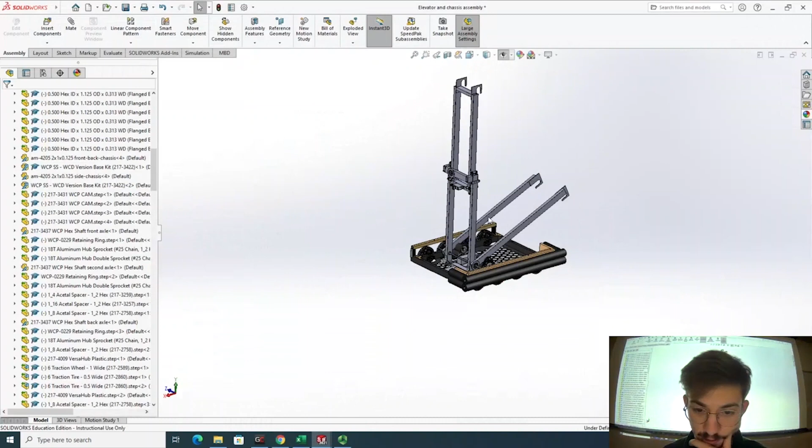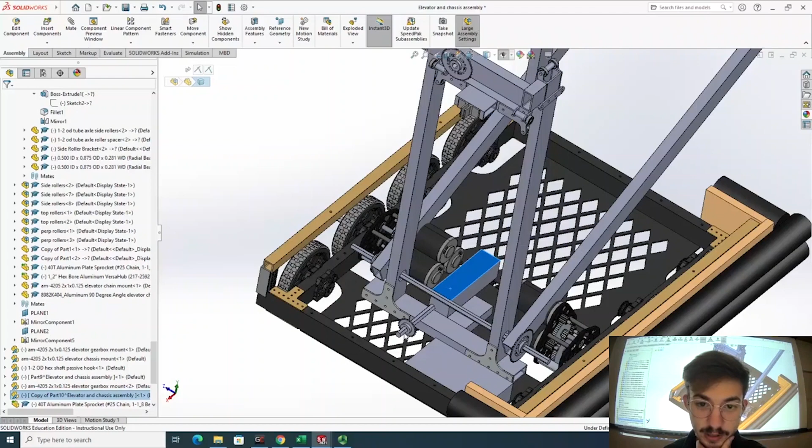So this is the overall design we're going to use. We're going to have a cascading elevator, or not a cascading elevator, it's only one stage. So we're going to have chain going around this sprocket. It'll be driven, this isn't a complete CAD model, but it'll be driven by a gearbox down here with chain going all the way up around this sprocket, and then it'll secure itself to the next stage in between here and then continue back down to this sprocket.

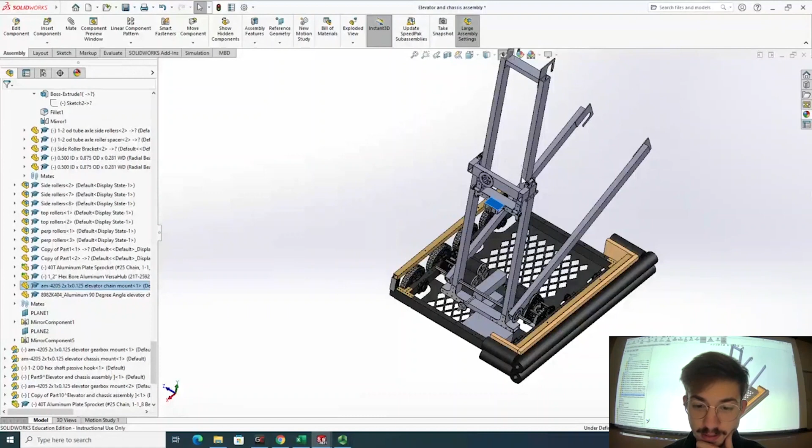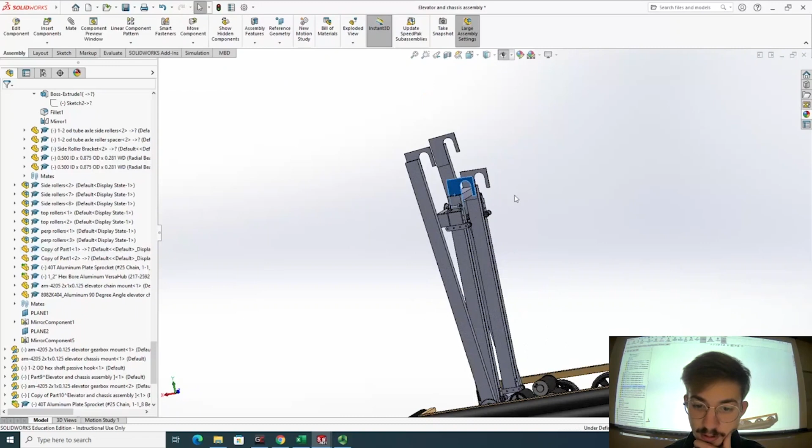Now, in order to be able to traverse to the next rung, our plan is to use these secondary passive hooks. So the way this will work in theory will be these arms will extend up, they will grab onto the rung, we will pull the robot up, and then once these come back down, I believe the lowest point they go to is right about here. These will engage, and these will be driven by a motor down here that will be geared very high. I'll talk about that in a bit.

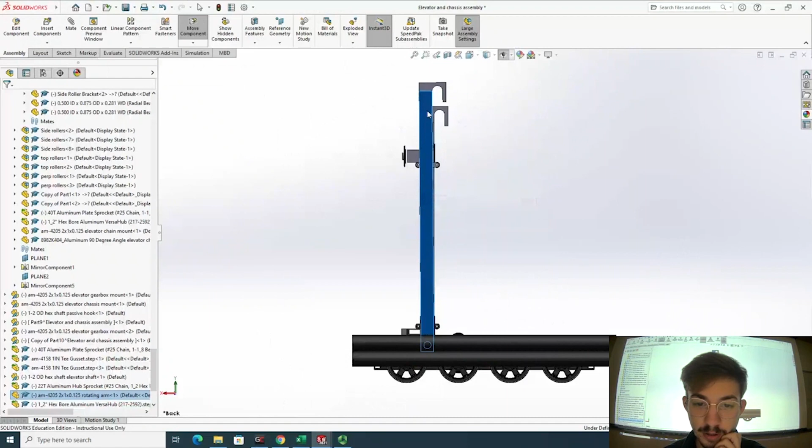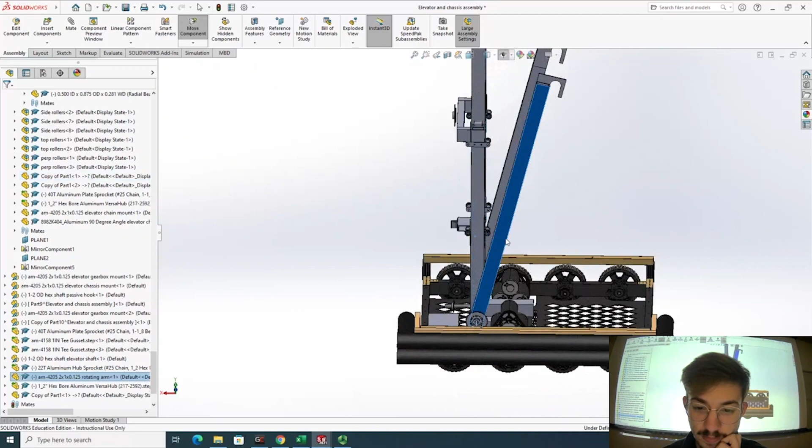But essentially, now that we have these locked on, well, they're not locked onto the bar, but they're close to. They're right above these. These will start inching up and essentially pass off the bar to these hooks. And so once these are disengaged from that first mid-rung that we're going for, what we can do is we can shift these arms this way. So essentially the way our robot will look approximately will be something like this.

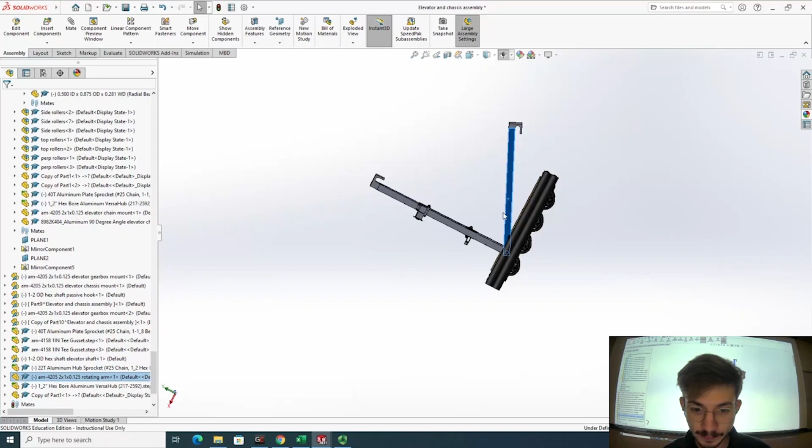These will need to go approximately 63 degrees, if not more, which is quite a lot, and we're going to have to counterweight the robot in theory. So then this extends to the next rung, and this will then shift our robot back as we need it to for these to engage the next rung. And then once these are engaged, we will pull ourselves up a little, disengage these, and repeat the process. So in theory, you'd be able to continue to climb to the next one, but obviously we'll need to test if this even works.

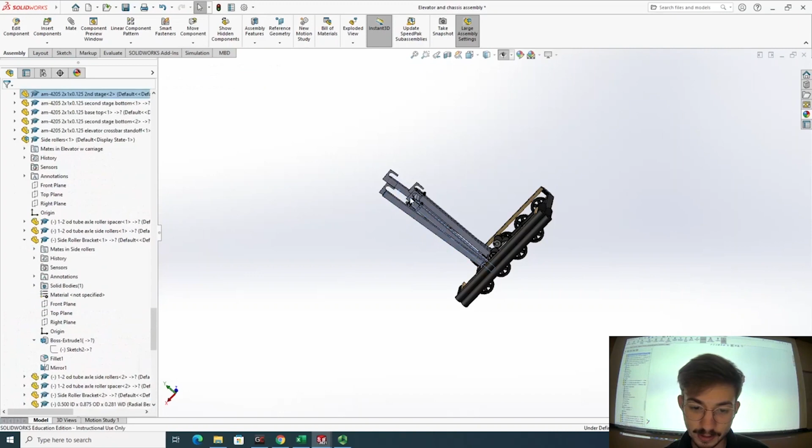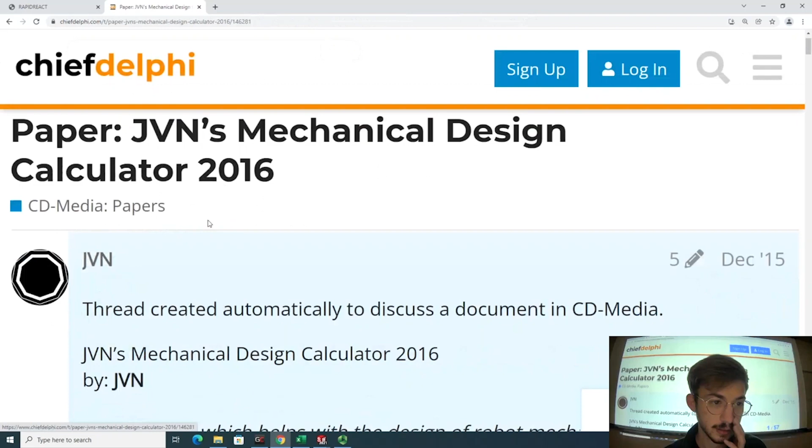So in terms of gearing everything, what we used was the JVN Calculator. So if you're not familiar with that, you can just search JVN Calculator Chief Delphi. It's already popping up for me because I've searched it. And you can, I don't know why I'm zoomed in so much, but you can download one of these Excel files, open it up, and it's very useful for calculating what gear ratios you need.

So for our passive hook, which is going to be just hooking on, what we did for this was we decided we would use two 775 Pros, and the arm length is essentially the distance between our axle right here and our center of gravity. We don't yet know what our center of gravity is, but we are assuming we're going to try and get it as close to the elevator as possible, and we assume that it will be no more than a foot away from this axle.

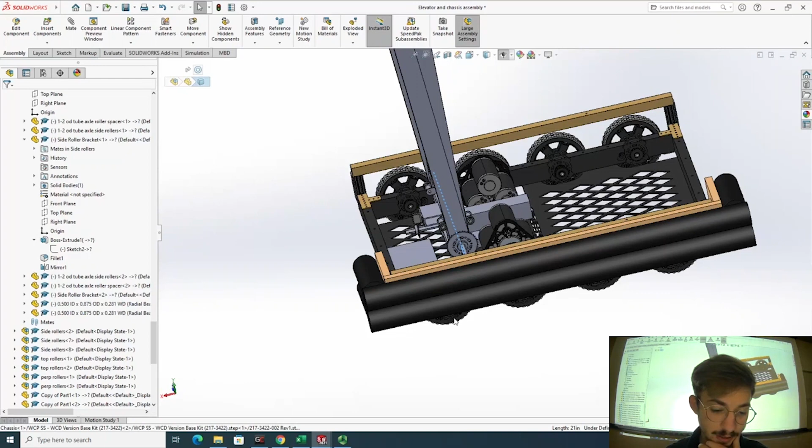And so that will be our moment arm, or like the distance that the force is acting on the robot. And so the center of gravity, we take it to be somewhere around here. We're making a lot of assumptions here. And our robot weight, we put at 155.

And so from there, we're going to be using a 100-to-1 AndyMark gearbox, and then I believe they're called Banebot dual inputs, that you can find on AndyMark, and those have a gear ratio of 3.25 to 1, and so that's how we're coupling the 775 Pros to the 100 to 1 gearbox.

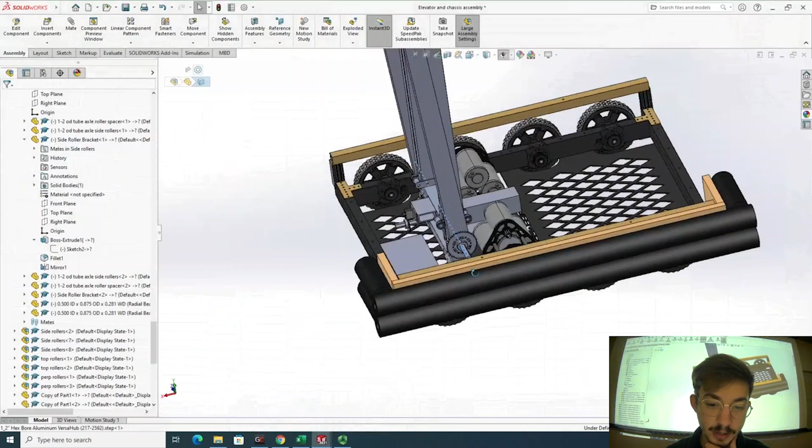And then the sprockets you saw on this CAD model, I don't have one on this side yet, but we'll have a 22 tooth to a 40 tooth sprocket. So that'll gear us down for a total ratio of 590 to 1, or 591 to 1. And so from there, we found that our max stall load is going to be 402 pounds, which should give us pretty good clearance. And this is assuming only 65% efficiency in the gearbox.

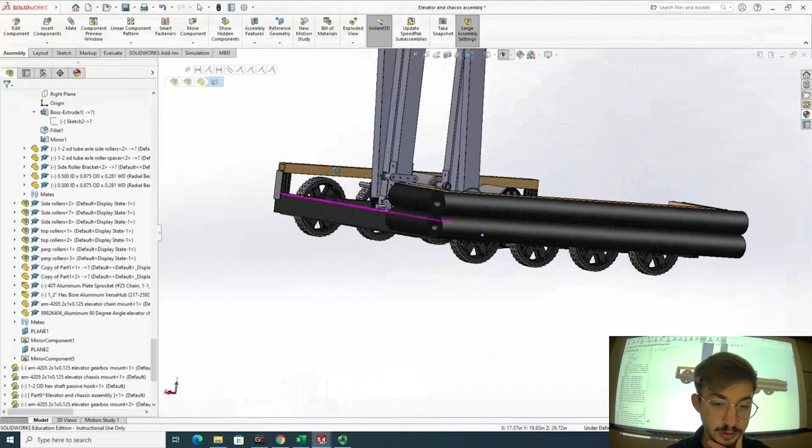Now for the elevator, you can also use this calculator. We're going to use a single 775 Pro with a 48 to 1 AndyMark gearbox, which was sponsored to us by AndyMark this year. And then we will drive it with a sprocket, which will add 40 to 22. So this is the 22 tooth sprocket, 40 tooth sprocket up here. And that will give us a stall load of 466.

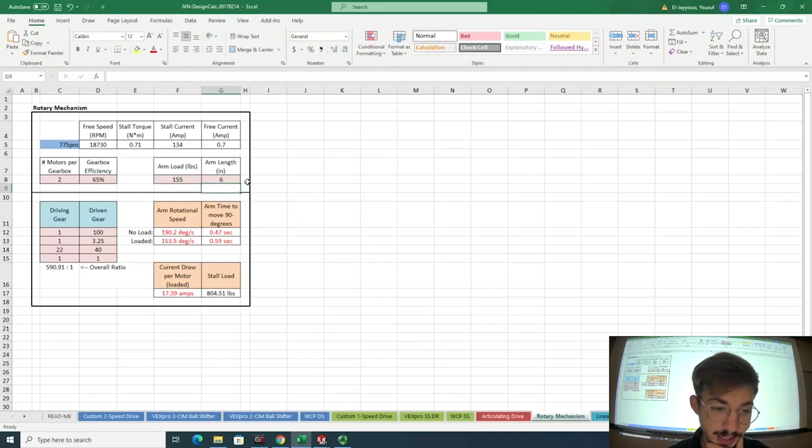And also the arm length, we have it at 12 inches. In theory, we think ideally it's going to be closer to 6 inches, and so that would double our max stall load.

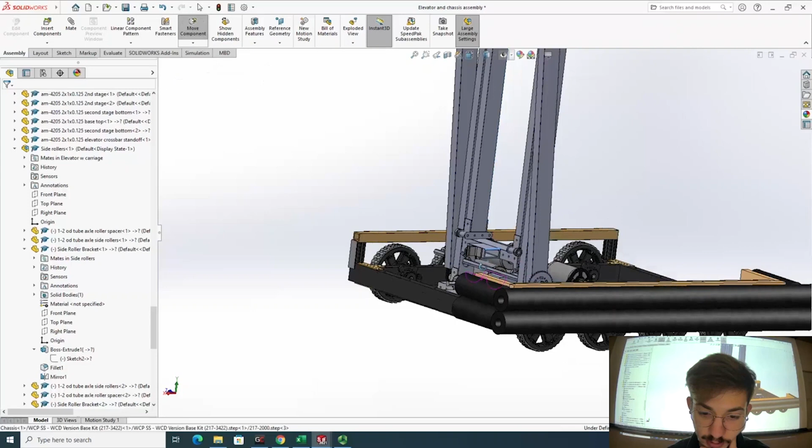And just to show you guys the extension of this, we're actually already folded up, so I'll show you guys what that looks like in the CAD model. Let me make sure we're not too low, that we're hitting this. We'll put a hard stop there later on. Gonna go ahead and save that. Open up my drawing file.

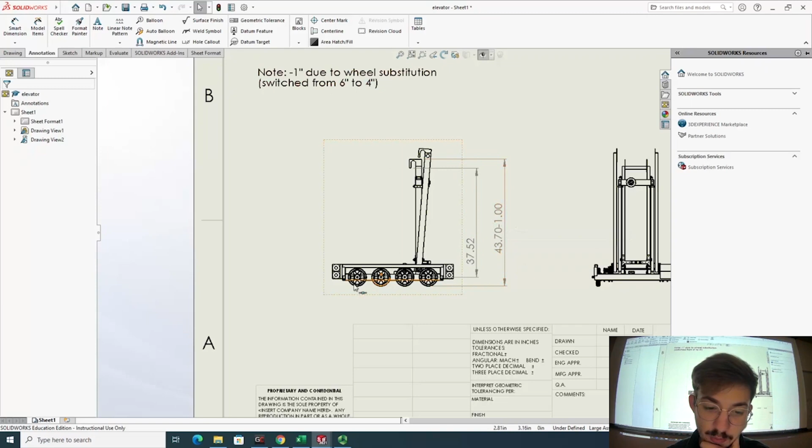All right, so starting configuration, 43.7 inches. The -1 is because we actually switched out our wheels to be 4-inch wheels instead of 6-inch wheels. So we're an inch below that, so we'd be 42.7. So we're well below the total height. Well, I guess this top one will be folded forward during our starting configuration.

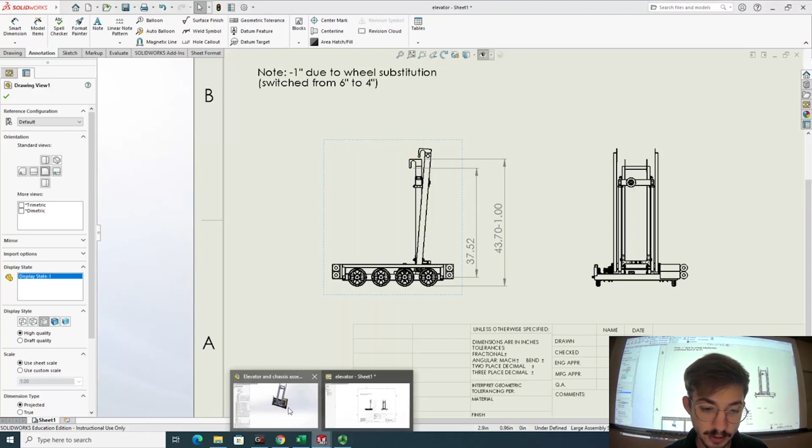Now, the bottom hook would be 37.52, which doesn't really matter in this configuration, but then whenever we extend this up to our full height, let's see where we're at.

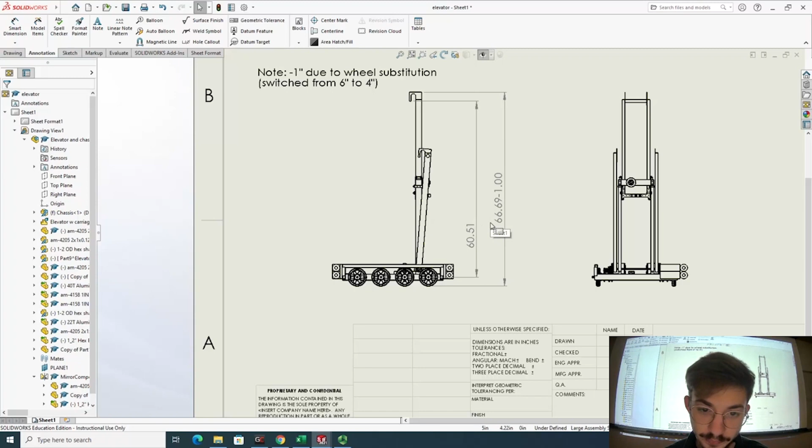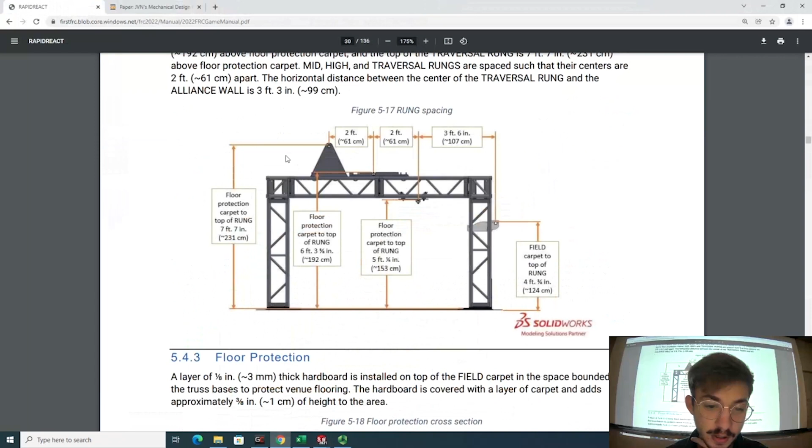So again, that puts us at 66.69 minus 1, so 65.69, which is within the 66-inch maximum height that you're allowed whenever you're climbing. And then the hook is at 60.51, the bottom of the hook, which will allow us to grab onto the bar, which I believe the top of it is at 60.25. Yeah. So in theory, this should work.

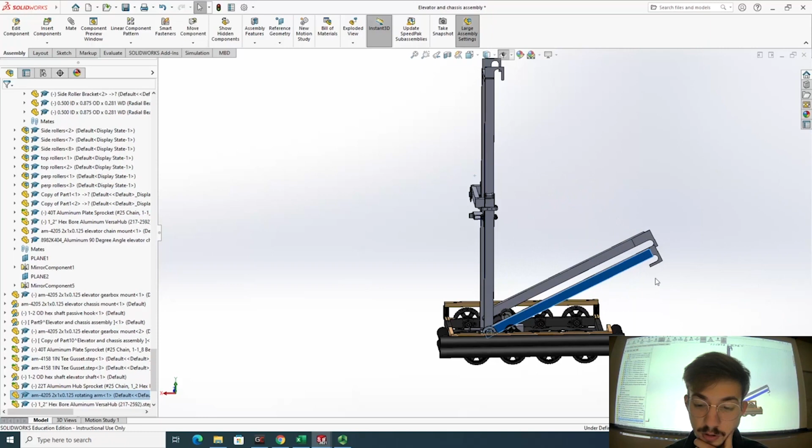In terms of staying within the frame perimeter, let's go back to the assembly. So we don't plan on going too far this way, but we're obviously going to go very far forward in order to go to the next rung. And whenever we do that, even if we actually fold all the way out, it's still within the 16-inch perimeter rule. The only other thing here to note is that we don't actually have 3 motors on here. We have 2. This is just the CAD model, so it won't interfere with that.

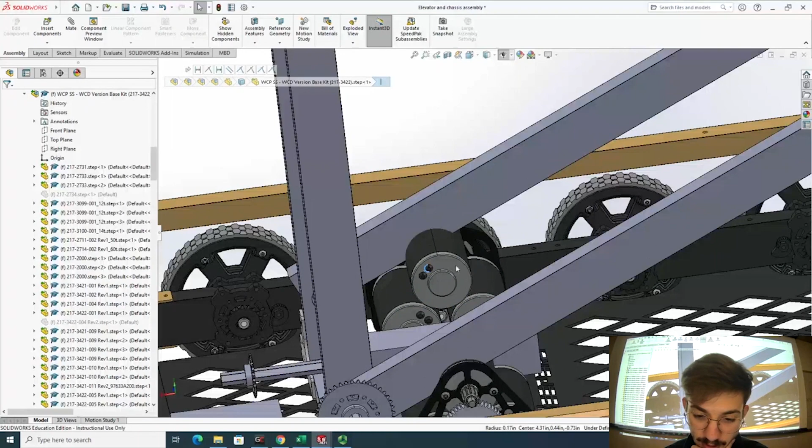But tomorrow we plan on starting to construct this, and hopefully we will have more of an update and maybe be able to test it tomorrow or Monday.